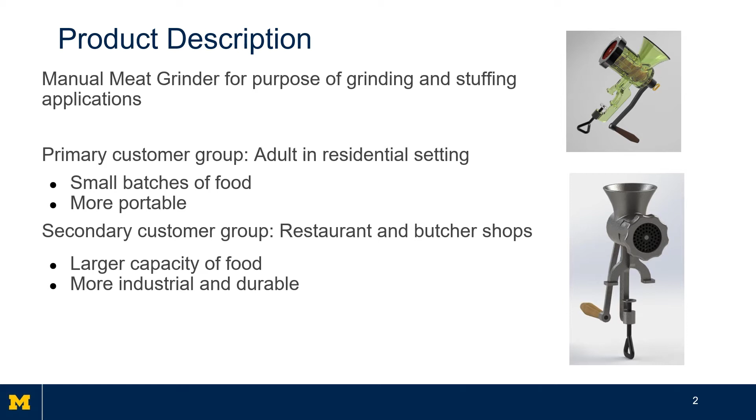Our primary customer group is going to be adults in residential settings. This customer group is more interested in smaller batches of food and a more portable solution that doesn't require electricity for applications such as camping. Our secondary customer group are restaurants and butcher shops, and they're more interested in larger capacities of food and a more industrial and durable application.

In terms of functional analysis, the task function here is to grind food, and the primary basic function is to store food and convert the texture. In terms of storing food, we want to contain the unprocessed food, especially for a larger capacity for our secondary customer group. And we also want to prevent spilling. And in terms of converting the texture, we want to transport and break down the food. And some other notes is that we want to facilitate cleaning, enhance portability, and then also prevent blockage within the system.

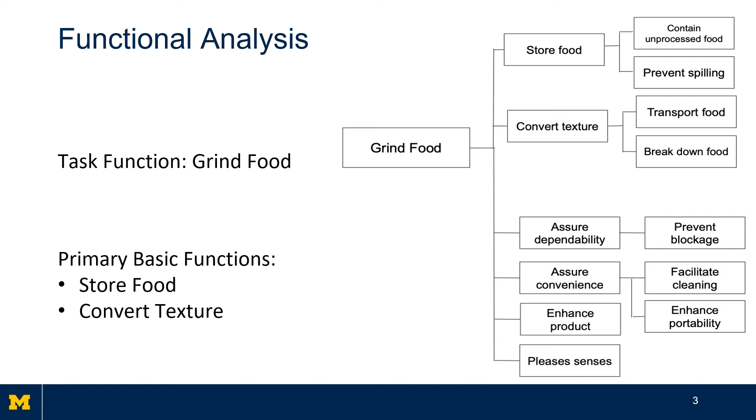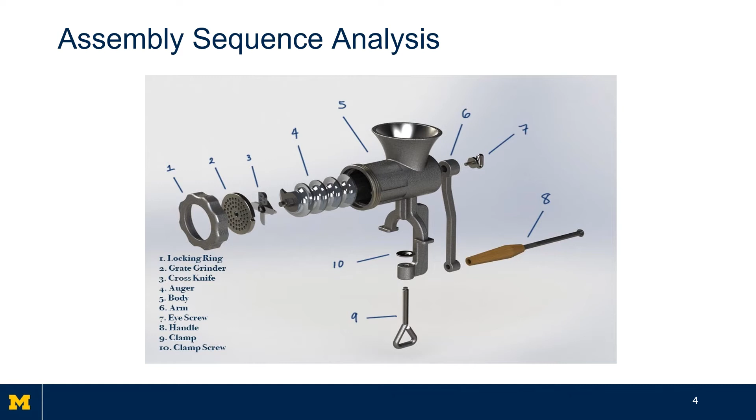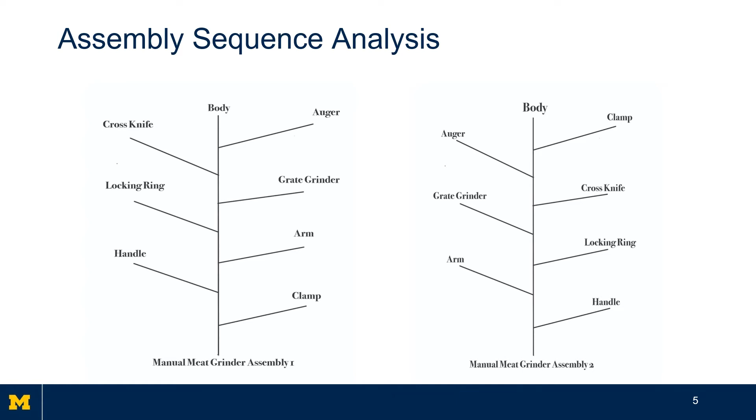Here we have a CAD image of a meat grinder disassembled in a way that allows one to see where the parts should go in relationship to one another. These are the two feasible assembly sequences for the product. The auger, cross knife, and grate grinder have to be assembled in a specific order, which is seen in both sequences. The difference between these two is that in sequence 1, the clamp is assembled at the end, while in sequence 2, the clamp is assembled first.

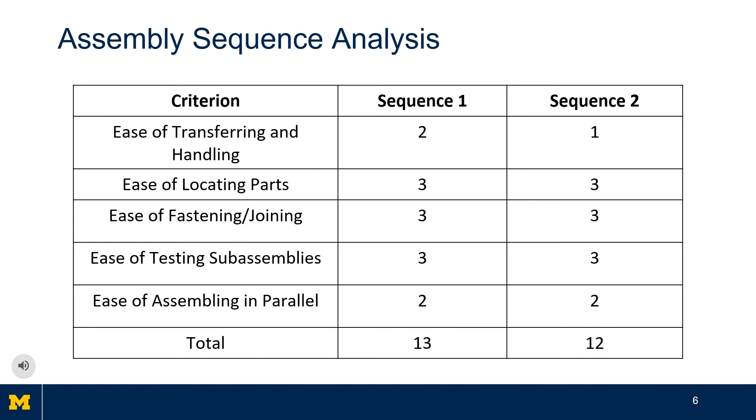This table compares the two assembly sequences based on the criteria listed. Having only one major difference between the two sequences gives them very similar totals, with sequence 1 being the better of the two. Assembling the clamp first creates an inconvenience in handling during assembly, which is why sequence 2 receives a lower score in that category. Both sequences require you to hold and reorient the body when assembling different parts, which is why neither have perfect scores in ease of assembling in parallel and in ease of transferring and handling.

Here is our function component mapping matrix for the manual meat grinder. The matrix shows the relationship between the individual components and the basic functions that were at the end nodes of the FAST diagram. Most of the components served only between 1 to 2 functions with the exception of the auger. This indicates a large potential impact on the grinder if the auger was to be redesigned. The functions transport food and break down food are influenced by many components, which shows that these functions were important considerations when designing the grinder.

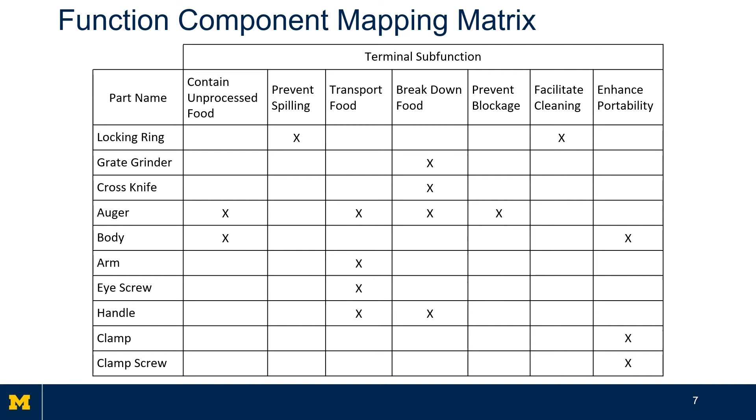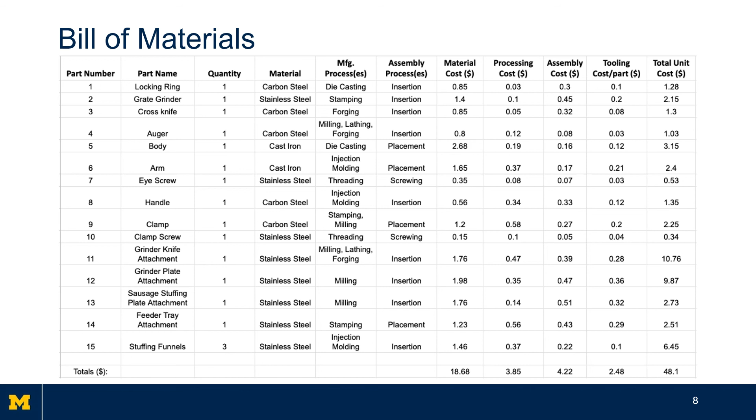This is our bill of materials for the manual meat grinder. For this, we assume that the total production volume would be 200,000 units per year. We also assume that the tooling life would be the same as the production volume. The assembly labor cost is estimated to be $15 per hour. The total manufacturing cost per unit came to $48.10. This is approximately 70% of the retail price of similar manual meat grinders and their attachments.

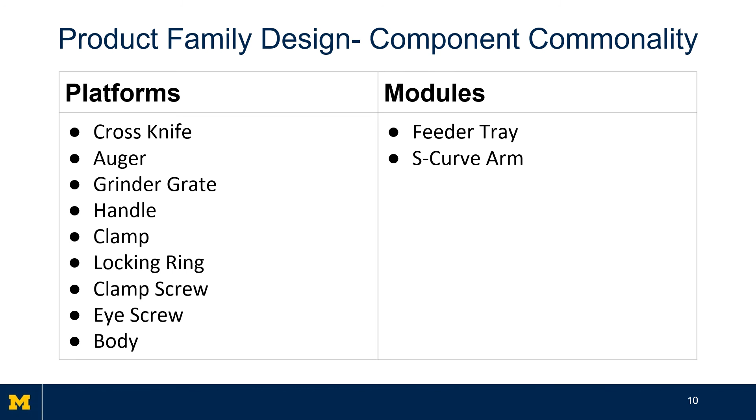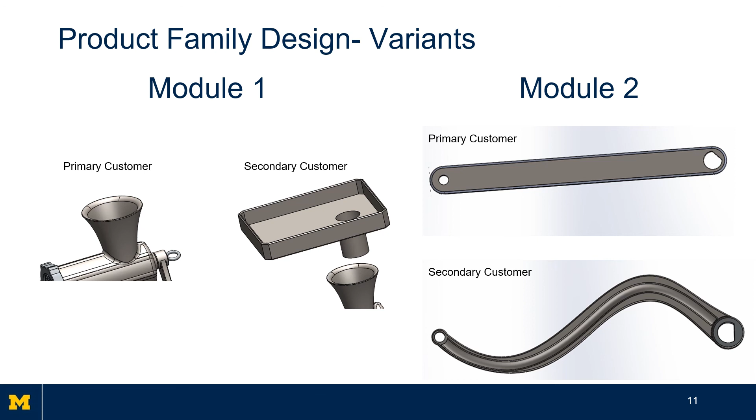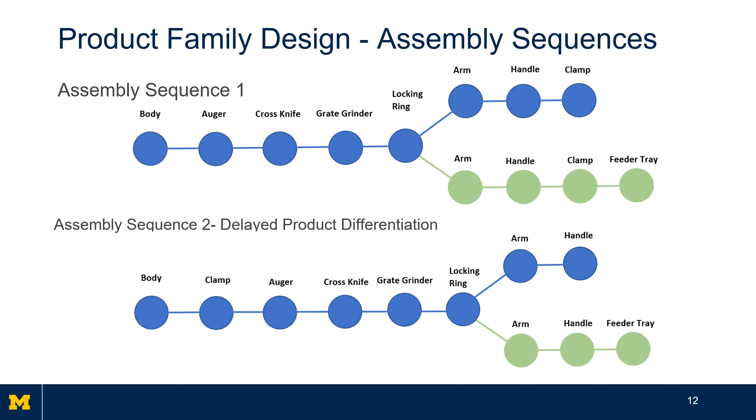Delayed product differentiation is essential to keeping the manufacturing process streamlined and efficient. In the first assembly sequence, you can see product differentiation occurs, but there is still a part added after the clamp that is common to both assemblies. By moving this common component to earlier in the series, we are able to streamline this process.